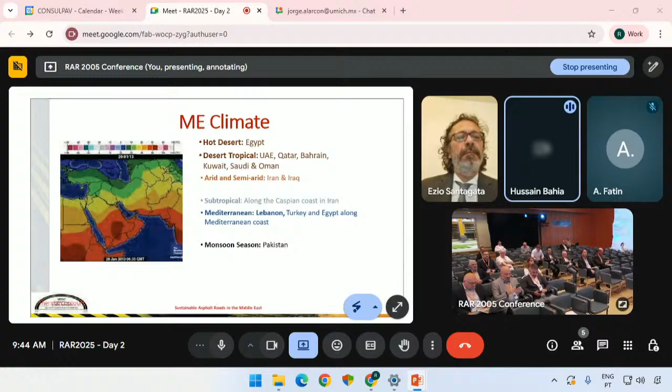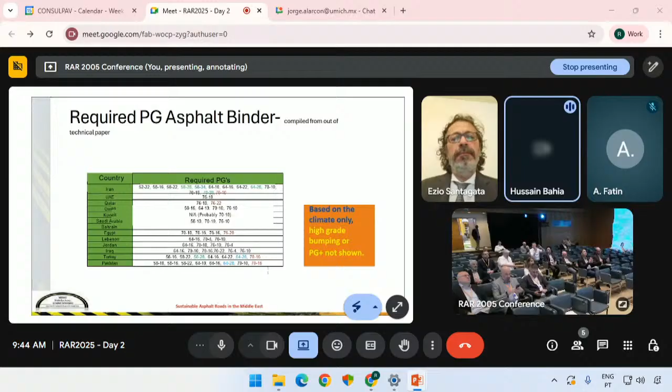Next, please. There are many specifications in the Middle East, and particularly in the last 10 years, since MISAT started, the adaptation of performance grading of asphalt binders or bitumen is becoming very common. We have a huge database on all the grades being used in the Middle East, and we'll be very happy to share this with you when and if you need such information.

Next, please, Kamil. This is a very good opportunity to present MISAT because asphalt rubber is a modified bitumen, which is obvious from the name, and we're using a recycled material in many cases to improve it. Asphalt rubber has been used in warm climates in many regions, particularly in the US, and if you Google Professor Kamil Kaloush, the history of scholarly publications, you will see how much work he and his team have done on this topic. So there are many ways of modifying bitumen, but certainly asphalt rubber has proved to be one of the attractive and cost-effective methods.

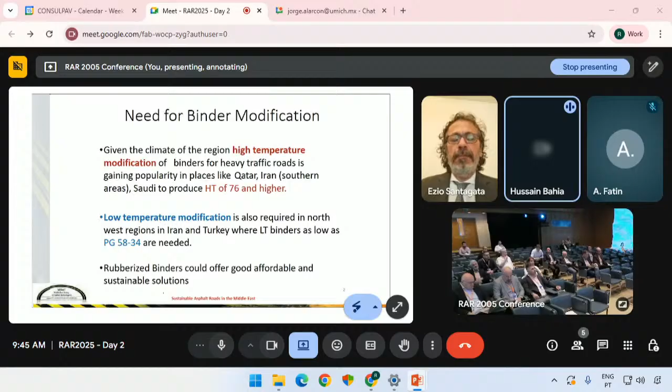So I wish you a very good session. I'm sorry I'm not there in person, but I'm very eager to listen to the experts who graciously agreed to help us with this session. Thank you, Kamil, and I'll turn it back to you.

Thank you, Dr. Bahia. This is great background. I also should have mentioned that Dr. Bahia is one of the co-founders of this great organization for the Middle East. We appreciate all that you do.

So our first speaker in this session does not need to be introduced. I first met Professor Ezio Santagata back in 2000 - it's been almost 25 years, Ezio, in Italy. He has been doing a lot of pioneering work in asphalt pavements, and lately in crumb rubber applications. He's currently a professor at Qatar University. Feel free to introduce yourself and what you're doing in Qatar, and you have the floor for the first presentation.

Thank you so much, I will share my screen first of all. Can you see my screen now? Yes, we can. Everybody's good? Yep.

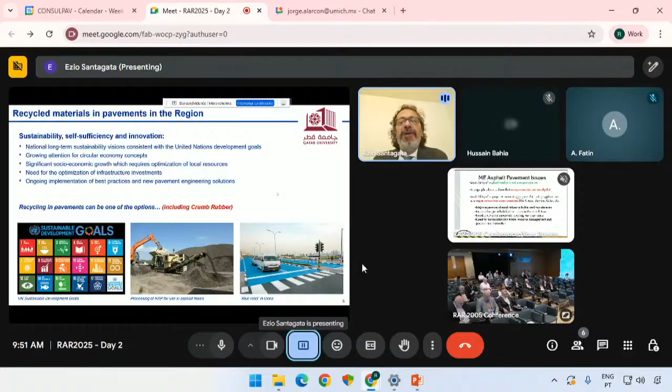Now, a few more slides on the general situation. What is really promoting sustainability and recycling here in the region, at least in Qatar? Well, the first component is sustainability, self-sufficiency, and innovation. Self-sufficiency has been, in fact, put at the center of the stage because of the political situation in 2017, but it was also seen as an opportunity to push for sustainability and innovation. And of course, there are some guidelines coming from the United Nations, as well as generally shared circular economy concepts that have contributed to corroborate and make this inclination more robust.

Likewise, there is a need for premium performance in extreme conditions because of high temperatures and heavy loading. So there is the need for alternative and high quality components, and recycling can be one of the options, including, of course, crumb rubber. So with that said, I'll go to the lessons learned in Qatar through the Ashghal Recycling Initiative.

I'm sorry if I'm speaking very quickly, but I will try to give you a very quick overview of my experience. And I believe I need to stay in the 15 minutes.

So in Qatar, there has been very strong support from the government and an overall plan. Back in 2017, Ashghal had a circular in which they promoted the use of recycled material. And all the departments were alerted to maximize the use of recycled material. This was something really new because in the standard construction specifications, the so-called QCS, no recycled material was allowed. And even talking to the players of the industry, this was seen as something that was not acceptable.

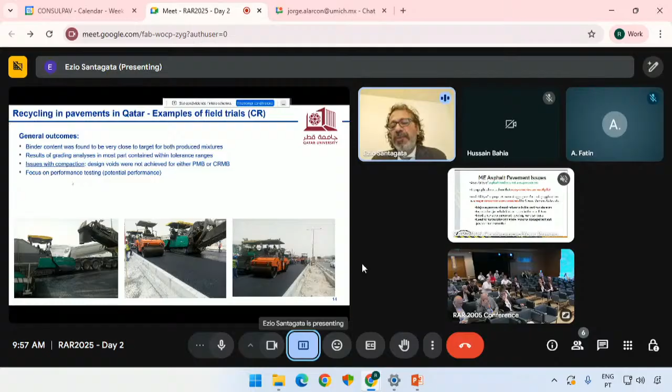But what happened in the trial? We went through all the analysis and the investigations. We found that the contractors were ready to produce. The binder content was acceptable. The grading analyses were fine. There were some issues with compaction. This is underlined because this is still today an issue. Not always, but it can be an issue, which can give some problems for performance. And then, of course, we focused on performance testing because we wanted to validate the potential performance of these mixes.

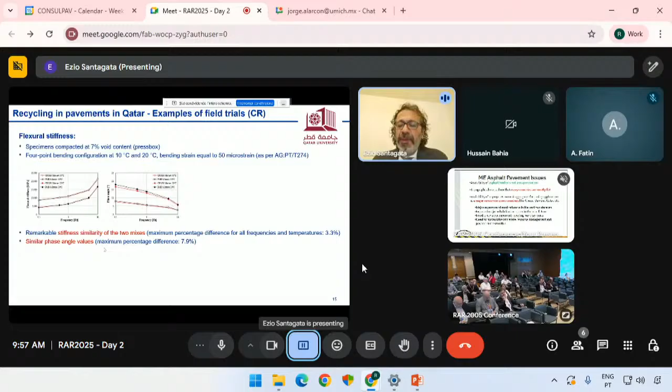So a very brief summary. We went through, of course, all the classical tests, on top of those that we could use for some modeling and analysis. For example, flexural stiffness at 7% void content at different temperatures. We compared a CRMB mixture with a PMB mixture. And basically, you see it here in these charts. The stiffness was almost equivalent, and we also had very similar phase angle values. So we can say that there was a certain equivalency between the PMB mixture and the CRMB mixture. Back then, the focus was to establish the equivalency.

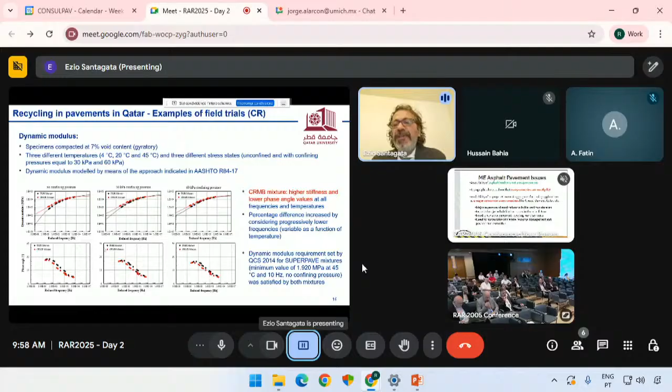In terms of dynamic modulus at different temperatures and at different frequencies, with the consequent construction of master curves, we compared once again the two mixtures and we found that the CRMB mixtures showed higher stiffness and lower phase angle values at all frequencies and temperatures, and this difference increased at the very low frequencies. So definitely this was promising with respect to the potential performance, and we were also meeting the QCS limitations for dynamic modulus, which in fact are quite low.

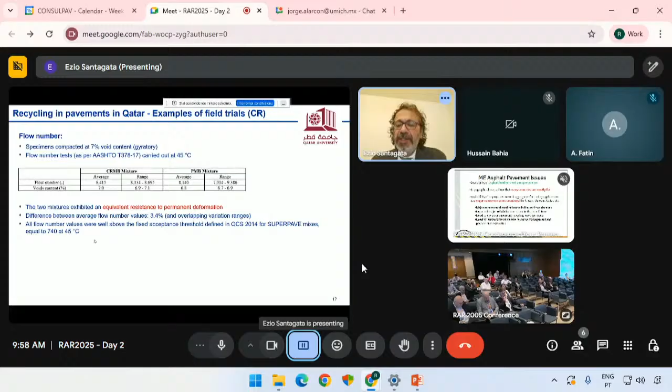So we checked the box, of course, with several field trials. We concluded that, okay, the country was ready for this, but nevertheless, contractors and consultants needed some kind of guidance. So we worked on some guidelines for the pre-qualification of crumb rubber and crumb rubber modified binders, and guidelines for the mix design of corresponding asphalt mixes. And these guidelines were made official. They were enforced by Ashghal, and obviously the contractors had to take them into account.

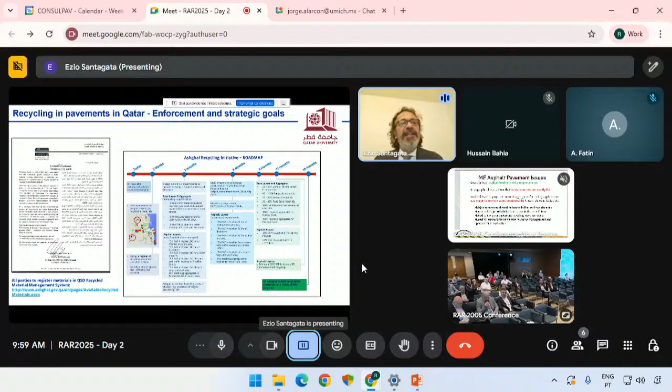Now, all of this was embedded, as I said, in the Ashghal recycling initiative. It was made official in 2018 with its own roadmap that required a timeline of 18 months and several supporting actions which involve logistics, regulatory requirements, mix design, and support from the Quality and Safety Department.

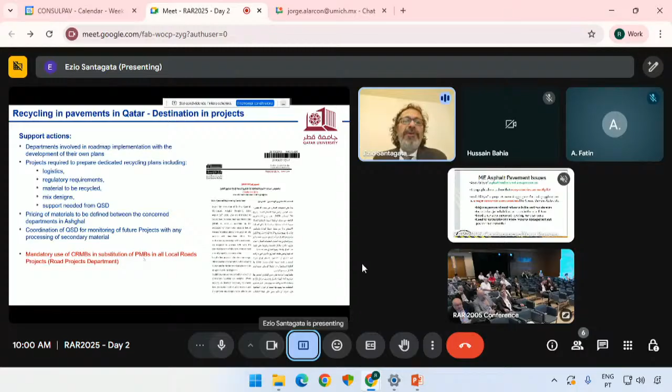What is really important to underline is that we had yet another circular from Ashghal in which CRMBs were made mandatory for use in substitution of PMBs in all local roads projects. Now, this was a turning point. All local roads projects, and we're talking about basically all the pavement projects, excluding the expressways and the major arterial roads, were required to have wearing courses with CRMB. So this made a difference.

With respect to the acceptance requirements for the CRMBs, the binders, it was simply required that the PG grading was to be a 76-10 as per local need. So we were applying AASHTO M332 with the exception, of course, of the clause on viscosity. For the CRMB asphalt mixes, we had basically requirements referred to the classical Marshall mix design with some additional checkpoints related to the tensile strength ratio and the rut depth measured using the Hamburg wheel tracker tests.

Additionally, we had other requirements that could be included in projects which refer to the dynamic modulus, to the flow number, and once again to the rut depth in order to have a better control of the potential performance. So supplementary performance testing was included as requested by the engineer.

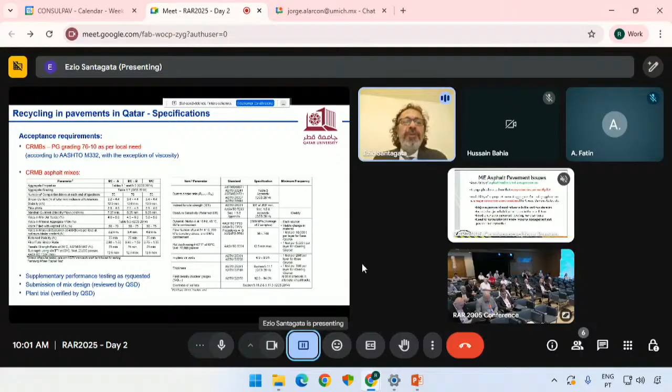The system that was created in Qatar, and to be honest, this was the work that was previously done by the team led by Professor Hussain Bahia, entailed a very articulate procedure for quality assurance and quality control with the submission of mix designs that were reviewed by the Quality and Safety Department and plant trials that were verified experimentally by the Quality and Safety Department. So very tight control on the qualification of materials and contractors, their entire system.

One step forward again, in 2021, we issued the Ashghal Recycling Manual. The authors are several. These come from Ashghal and from the team, the ANAS team that was working in collaboration with Ashghal. And if any of you are interested in giving a look, you can just send me an email and I will send you a copy of this document. It includes crumb rubber and other materials.

Of course, some supporting research was going on. Okay, we had the trials, but we were doing some research. These are some examples. We did a lot of rheological testing on CRMBs and the corresponding base neat bitumen, looking at how the master curves were changing with modification, both in terms of the complex modulus and of the phase angle. I cannot get into the details of this, but of course the database that we created was quite vast. It was coordinated by the Ashghal Center for Research and Development, and the Politecnico di Torino, back then my university, did a lot of experimental work.

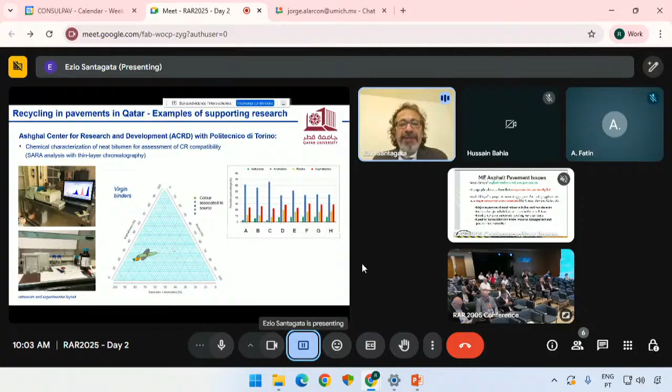We also worked on the chemical characterization of neat bitumen for the assessment of crumb rubber compatibility. And the main tool we used was the Iatroscan for SARA analysis. And we coded and classified the different sources of bitumen and related this to the compatibility with crumb rubber. And this was very useful for the formulation of stable CRMB binders.

Current challenges, very briefly. The general observation is that a significant portion of projects with CRMB wearing courses are in acceptable conditions and exhibiting a performance which meets design expectations. However, in some projects, early cracking has been observed. And some time back, I discussed this with Professor Bahia, and he has a lot of experience in the region.

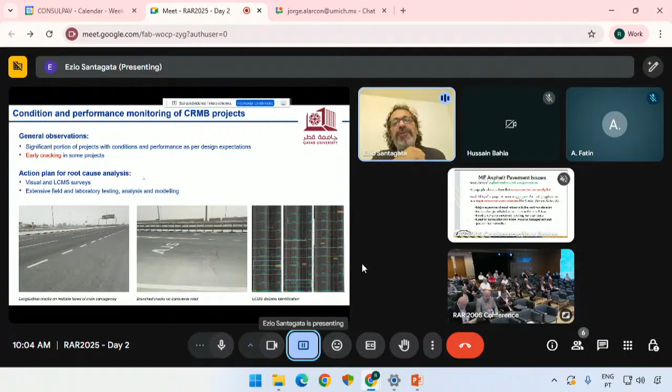And we made some hypotheses of the possible root cause. Now, in fact, we are narrowing down the root cause analysis, and we are getting there. And more or less, we had the correct idea. But before getting there, many surveys had to be done, visual and with the laser crack measurement system. And we also recommended extensive field and laboratory testing in order to go through the appropriate analysis and model.

Critical issues that have been identified according to the preliminary assessment are compaction and aging. We're not surprised, of course. With CRMB mixes, compaction can be a problem. This is related to the compaction temperature.

Sometimes it is related to the fact that these materials are so dense that it is difficult to move the aggregate structure. And to be honest, contractors sometimes tend to overcook these mixes in order to have sufficiently high temperatures at the exit of the plant and when they are arriving at the project. But still, we do have some compaction issues.

And aging, once again, may be a result of this overcooking, as well as the effects of UV radiation. And we know that simulative aging for this region is not a trivial task. So as a result of that, we decided to get deep into these compaction and aging issues. There are some ongoing research activities generated by the collaboration between Ashghal and Qatar University.

We're doing a lot of work on the mixing and compaction temperatures, focusing on the Casola method, the NCHRP 648 protocol, the so-called phase angle method. Very simple, very popular. We are encountering a lot of issues, not with the method itself, but on how to implement it and how to involve independent laboratories to apply it correctly. And of course, the CRMB by itself poses some issues in the data processing and in the data measurement.

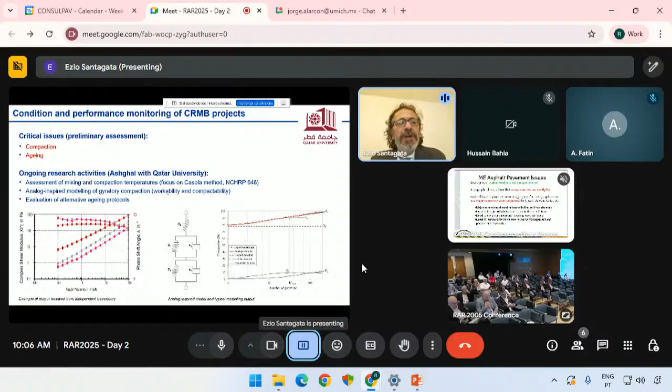The other tool we are using is an analog-inspired tool for the modeling of gyratory compaction, which allows us to extract workability and compactability parameters. This is a work that was previously developed at Politecnico di Torino by one of my PhD students, and of course we are developing it further in order to apply it to the case of dry mixes and in the region with CRMB binders. And finally, we are also working on the development of alternative aging protocols that can be simulative for the region.

Another activity which is currently running is with Qatar University and a private company of the US, the so-called IP crack project. The idea is to use a polymeric additive in order to enhance the construction and performance-related properties of CRMBs, in particular with a focus on workability and compactability. We have structured the project at the molecular, binder and mixture level, and we are expected to come up with a proposal for amendment of the current specification. This project is Qatar University with this private company and with the collaboration of Professor Hussain Bahia.

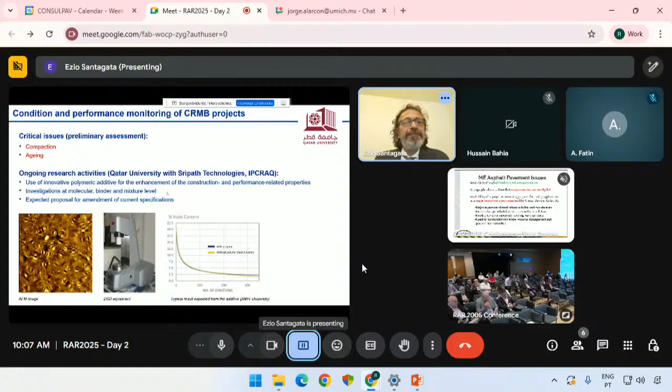My final thoughts, very quickly. I can state, based on my experience and discussion with colleagues, that the use of crumb rubber in binders and mixtures in the state of Qatar has been overall positive. Nevertheless, as academics, we need to promote some research to move forward. We need to support government and industry to understand the root cause of observed early failures. This is critical. If we don't do it properly, we will lose the opportunity to do more work and implementation with crumb rubber.

Definitely, we need to enhance pavement performance. Crumb rubber, we know, has this potential. If we use it properly, not only will we not have defects, but we can enhance performance. And this is the right time to push for this. This may require development of new techniques, maybe new analysis approaches. Definitely, we need to support implementation with technological solutions, with an appropriate interaction with the industry. We need to think of updating specifications and standards. This can also be part of the game.

We should not forget about including environmental impacts in future assessments. And finally, as academics, we need to remember that research is fun, but dissemination and sharing is also part of it. And we should give our contribution to the continuous advanced education of all involved players. I'm not only thinking of our students, I'm thinking of the players of the industry, which are eager to learn from us whenever we have something to teach which is real.

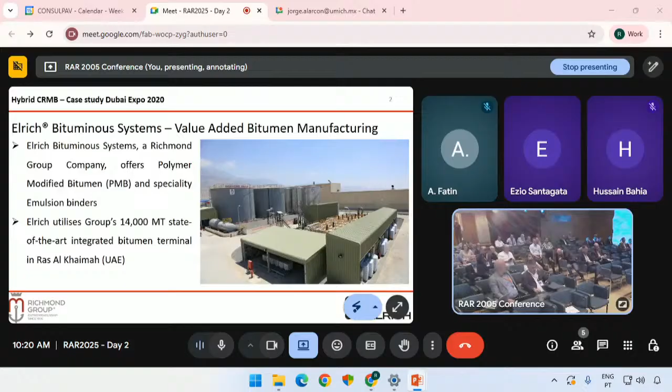So just a brief introduction about our company. Our company is based in UAE. We have our terminal of 14,000 metric ton in Ras Al Khaimah, the northern emirate, and we work with everything related to bitumen, so polymer modified bitumen, emulsion, cutback, and crumb rubber modified bitumen. Our main area is the Middle East, but we work a bit all over the world, and we have different contracting in India, and we can ship material everywhere, both in drums, ship, and bitutainer.

So the project we will talk about today is the Dubai Expo 2020. From October 2021 to March 2022, Dubai hosted the event Expo 2020 with 1 year of delay due to COVID. The event recorded more than 24 million visitors. And for this event, the RTA, the Dubai Road and Transport Authority, built a car park with around 30,000 cars capability.

Since one of the topics of Dubai Expo was sustainability, the RTA decided to use crumb rubber modified bitumen for the wearing course of the car park. For the project, they decided to use a 50 millimeter thick wearing course, and our company supplied a total of 8,000 metric ton of hybrid crumb rubber. And these are the areas paved with crumb rubber modified bitumen.

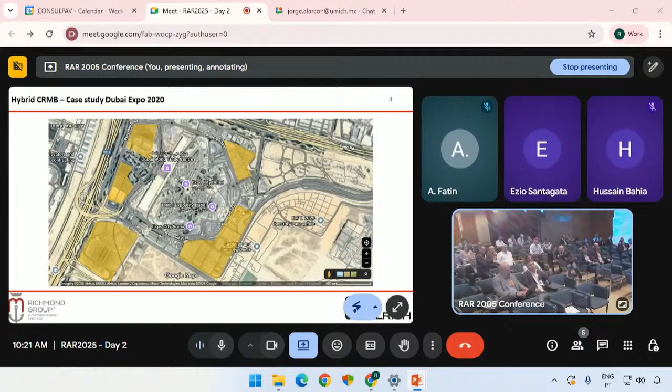Since there is no proper specification in UAE at that time about the crumb rubber, Elrich crumb rubber is based on the requirement of ASTM D6114 and Arizona DOT, and it was manufactured using local crumb rubber from UAE and some proprietary additives. These additives were specially designed and selected to overcome some of the most common disadvantages of crumb rubber, like high viscosity and high compaction temperature.

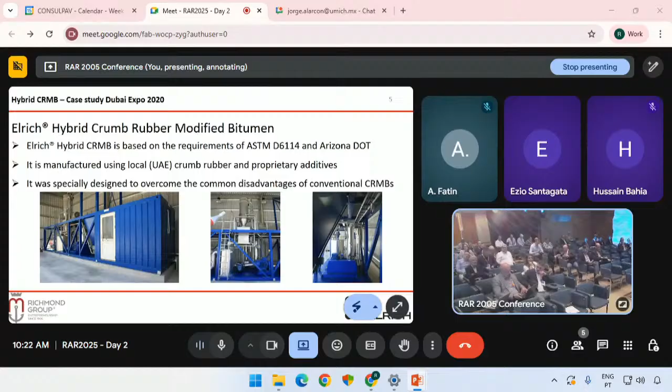Since it was one of the first projects using crumb rubber in the region, the contractors were a bit scared about this new material, and that's why they asked us to design something with a bit lower viscosity, but still using crumb rubber. So our hybrid crumb rubber has a lower viscosity compared to normal rubber modified bitumen. It has a longer storage life, and we had to do this because the contractor was not sure about the immediate use of the material, so we were not able to produce crumb rubber and use it immediately. Sometimes the modified bitumen had to stay in storage for a couple of days, and we had to assure that the material would not degrade during this time.

Another advantage of the mixes produced with our hybrid bitumen is better workability, since the mixing and compaction temperatures are lower, higher rutting and cracking resistance compared to normal crumb rubber modified bitumen, and also higher resistance to moisture damage. These are some of the properties of hybrid crumb rubber.

The mix design was performed by the contractor using a standard Marshall mix design method commonly used in UAE, and then verified at a governmental reference lab. All the process was supervised by Parsons consultant.

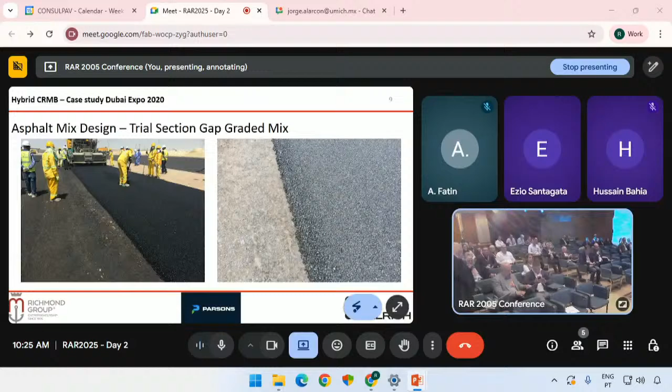These are some pictures during the trial. Another trial was done with a gap-graded mix that showed very good performance and good texture, but in the end it was rejected. These are some pictures with the dense-graded mix.

This is a comparison taken from both the gap-graded and the dense-graded mix. As expected, the gap-graded gradation had a much more evident texture compared to the dense graded, but the authority was a bit scared of using this new gradation, so they decided to go back to the standard dense graded mix.

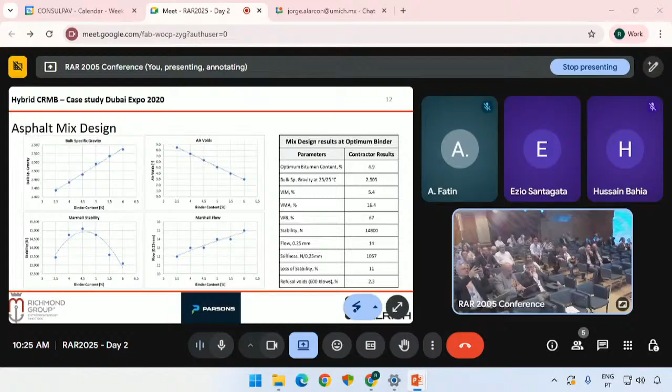These are the results of the mix design. The optimum binder content was 4.9, which was quite high for the region, where usually a dense grade mix has from 3.8 to 4% binder content. These are some of the other properties from the Marshall mix design.

Other than the standard mix design, it was decided to run some performance tests on the mix. The first one was to verify two different rubber producers using two different crushing methods: a crumb rubber produced using a cryogenic method and one rubber produced using ambient temperature crushing.

Mixes were prepared in UAE and then shipped to Wisconsin to Dr. Bahia's lab, the Modified Asphalt Research Center, and both rutting resistance using the Hamburg wheel tracking test and the CT index were verified.

This was done to verify if using the cryogenic crushing method could lead to better properties of the mix, even if the cost of the raw material was a bit higher.

These are some of the peculiarities of the cryogenic process. Rubber produced using this method has higher uniformity, smaller dimension, and lower specific surface, but it also has lower productivity and higher cost.

So it was decided to verify these two types of rubber to see if the advantages of using a cryogenic process can overcome the higher cost.

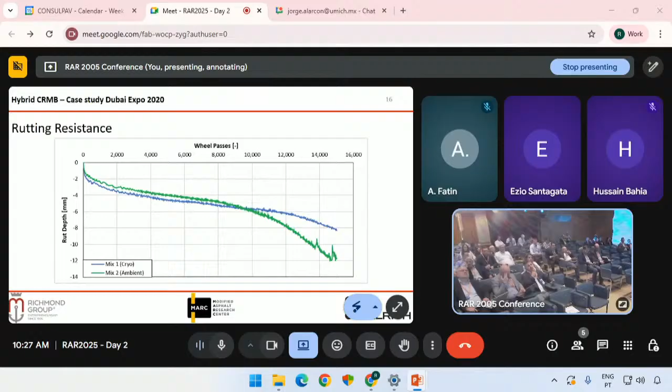Both of them had good results, but the cryogenic rubber showed better performance compared to the ambient temperature one. This is the average graph of the two mixes.

Cracking resistance was verified using the IDEAL CT test at 25 degrees, and both the peak load and the CT index were measured. Both mixes performed quite well, and in this case also the cryogenic rubber showed better performance compared to ambient temperature crush rubber.

Another test we ran was the warm mix properties verification. This is because, as Dr. Santagata said, sometimes there is a need to overheat the material because the contractor is scared about the compactability of the material on site.

But one of the advantages of using hybrid crumb rubber modified bitumen is that the workability and the mixing and compaction temperature can be lower. To verify these performances, we shipped some material again to MARC's Laboratory in Wisconsin, and samples were prepared using a gyratory compactor at two different temperatures, 165 degrees and 135 degrees, so 30 degrees lower than the conventional temperature.

Then the ratio of the number of gyrations needed to reach 92% of the GMM were measured.

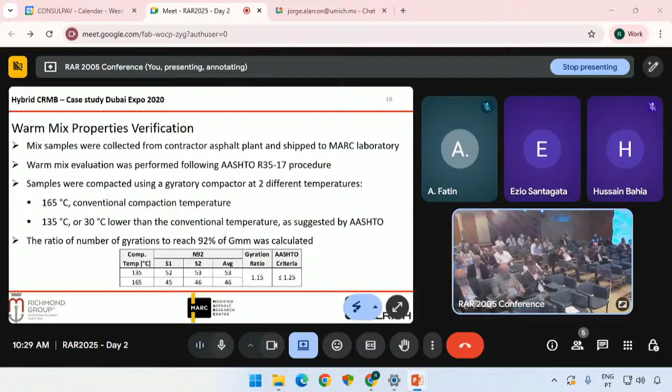In this case, the ratio obtained was 1.15, which is lower than the AASHTO criteria of 1.25. That means the material has good compactability even when compacted at lower temperature than normal. These are the compaction curves from the mixes at the two different temperatures, and this test highlights the good workability of mixes prepared using a hybrid crumb rubber modified bitumen.

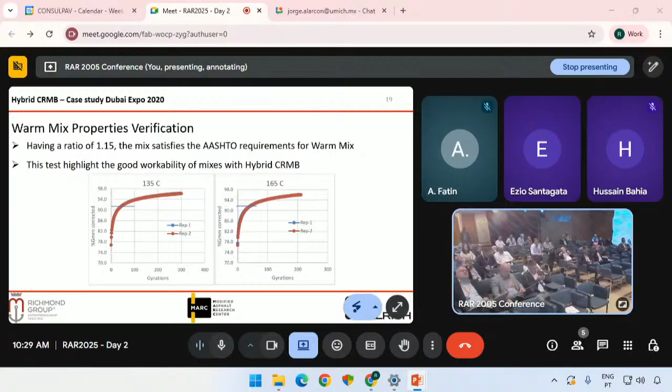So in conclusion, for this huge global event in Dubai in 2020, crumb rubber modified bitumen was used to pave all 30,000 car park spaces prepared for the event, and LRH was selected as the crumb rubber modified bitumen supplier. To overcome some of the common disadvantages of crumb rubber, a special hybrid bitumen was developed, and the mix was tested for its performance using both wheel tracker and rutting index tests. Two different rubbers were tested, and cryogenic crushed rubber showed better performance compared to ambient temperature crushed rubber, and the mix prepared using hybrid crumb rubber showed warm mix performance.

That means it can be compacted and prepared at lower temperature, which is a good advantage for the contractor, who can be a bit more relaxed during the execution phase. But also from an environmental point of view, it has a lot of advantages because we don't need to overheat the aggregates and the binder, but can keep medium or lower temperature.

And the performance of the parking lot, which was supposed to be in place for only 1 year, has been very good. The parking lots are still there for more than 6 years without any problem, and they were used before and after the project as a storage area for all the construction vehicles. So it has experienced some very heavy and slow traffic on it, and there is no sign of any damage.

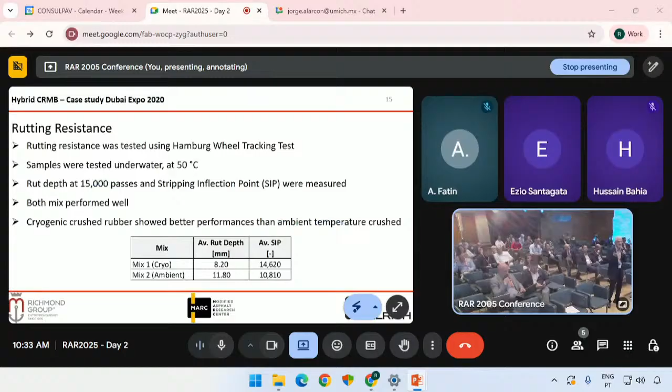Okay, the second question is about, you said you are shipping this to India and different places, and then you showed the table that shows some of the specification, such as penetration, softening point, and other things. It's actually a mixture of specifications. Some of these could not be really relevant for asphalt rubber binders, such as softening point or penetration and so on.

Did you do some sort of testing based on SHRP, SHRP Plus testing on these binders, and do you have some results? Yeah, I don't have the results here, but yes, we did all the tests. The problem at that time is that there was no specification at all for the material, so we were left basically free to use whatever we wanted with the material. They wanted to use crumb rubber, so we were forced to use rubber, but there was no requirement at all for the test. We usually run all types of tests on all our bitumen, but in this case I just reported some of the common parameters that are required in UAE. That's why only this table.

Okay, so I would suggest that next time you do some presentations, show some master curves of the behavior and so on. Thank you. Any other comments or questions? Excellent. Thank you.

I didn't quite understand how much percentage of this hybrid material you put as a percent of the bitumen. Crumb rubber was around 15% of the bitumen weight, and the other additives around 4 to 5%.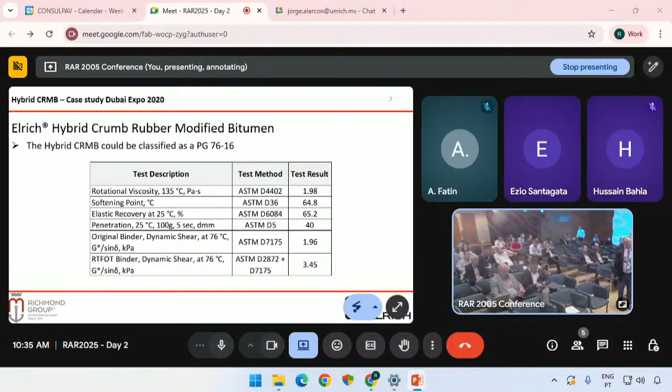Yeah, but that's strange because you only get the PG 76 with 15% crumb rubber. In the wet method, you would already be at PG 85, 86, or higher. What was the base binder before the 76? It was PG 58. So that's quite a jump, from 58 to PG 76 with 15% rubber. But we also have other additives that lower the viscosity of the material a bit, and these can lower the performance grade a bit.

Okay, thanks. What's really interesting here, and we've done something similar, is those mixing and compaction temperatures with the warm mix additives are quite a bit impressive for a crumb rubber mix. This was the main purpose of this material, because the contractor was really scared.

It was their first project with crumb rubber modified bitumen, and the quantities were quite a lot. So they were really scared about the entire workability of the material, from mixing to laying the material at site. And it ties in with the overcooking issue that we just mentioned in the previous presentation. So I think this hybrid system is really one successful process to go about.

Yeah. It could be a good solution to introduce crumb rubber modified bitumen in places where, like we were saying yesterday, contractors and authorities are quite scared about using new materials. And with this hybrid modification, we have a crumb rubber modified material, so something new, but that behaves, at least from the workability point of view, like a normal bitumen. So contractors are more willing to give their time and machinery to test this new material.